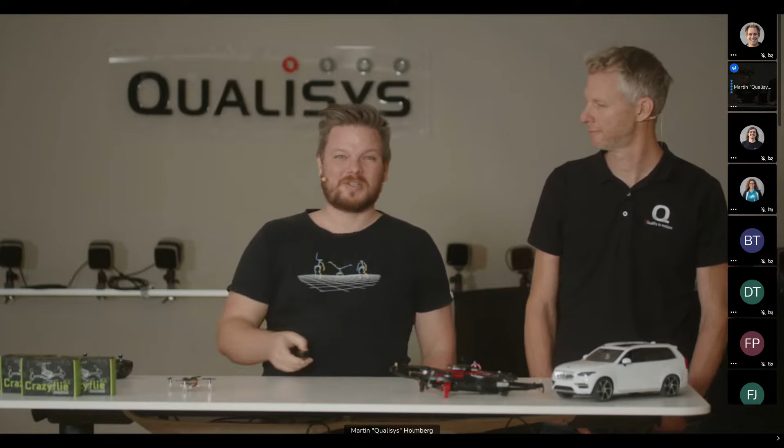We have been working with BitCraze for about 7 or 8 years now. I first came in contact and had a chat with Christopher, and then we started doing collaborative work on some of the products we're going to show. We went to exhibitions together and so on. It's been a pleasure, it's one of my favorite companies to work together with, and it's always nice to get the opportunity to go down to Malmö and eat falafel and enjoy the southern parts of Sweden.

A fun thing is I got this on Facebook today, where it said, you have a memory from 3 years ago. BitCraze was visiting us, and we got the opportunity to fly a bit of swarms. We got the opportunity to do what you always do when you fly drones, and you crash a bit. This is one of the things I enjoy with BitCraze and working with it, the fact that you can test and try things out. You don't have to have a net. It's so durable, and it's so easy to repair also. So it was just a nice memory to wake up to.

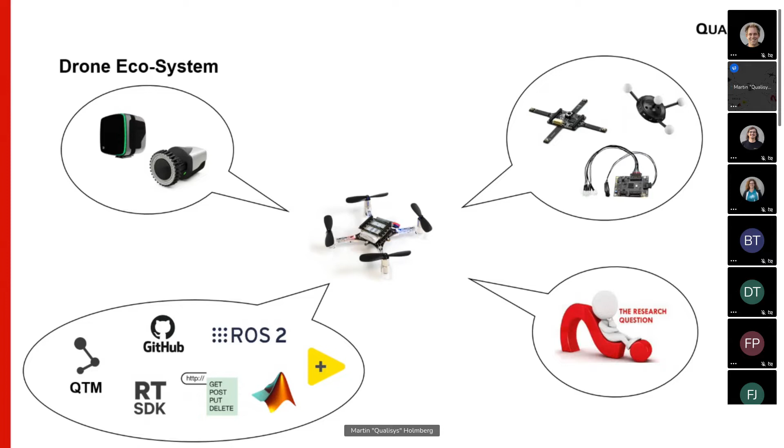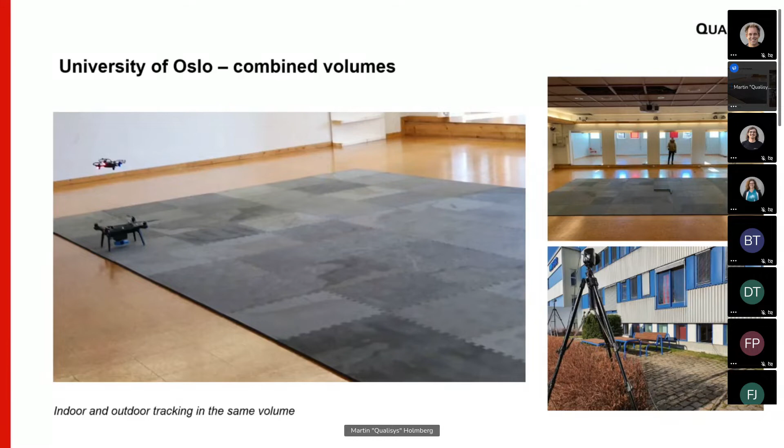So with that said, let's kick this off with a couple of examples. This one is a nice show of a standard setup in some aspects, but different in others. This is the University of Oslo, and they have a 3-volume mocap system. So you have 2 rooms indoors, separated by the pillars you see. But what is quite unique is that they also extend the volume outdoors.

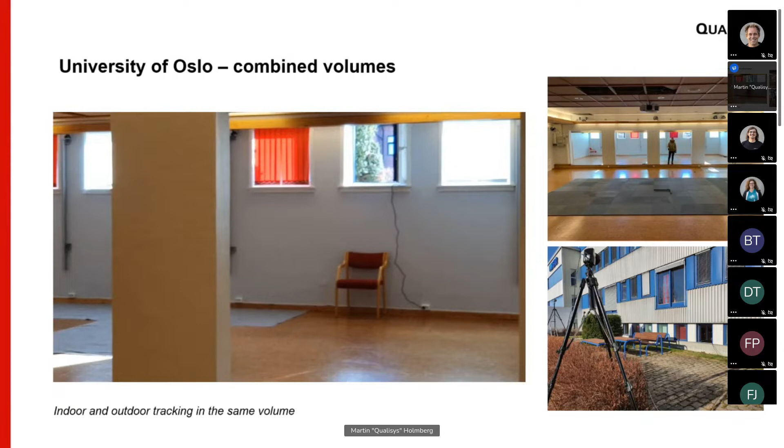Towards the end of this short clip, you'll see the drone approaching the window slowly, making its way out. On the bottom right, you see footage from outside their lab. This allows them to do some unique experiments, thanks to the outdoor capabilities of the Qualisys system, which survives outdoor weather and can operate in bright light.

Another really cool installation is this one, from Purdue University in the US. It's the largest indoor motion capture arena for drones that we know of. They house it in an old aircraft hangar.

The reason for them to do this is that they're looking to track fixed-wing aircrafts indoors. The volume is something like 60 by 30 meters.

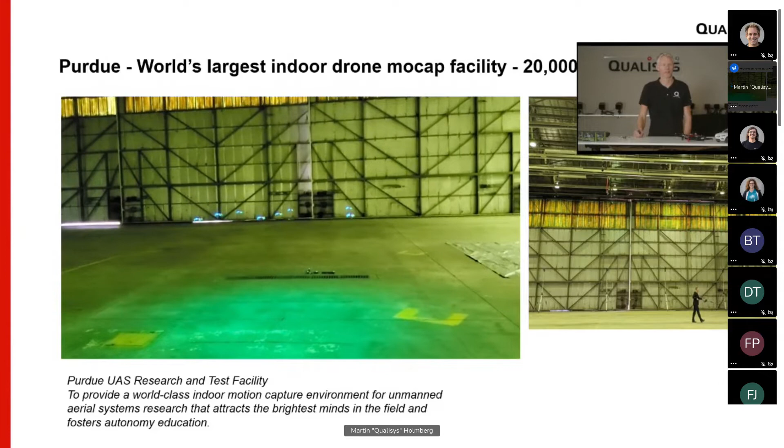On the bottom right, or on the right side, you have an image of the volume. It's something like 8 to 10 meters up to the cameras. What's so cool is that the video you're watching now shows Crazyflies being tracked.

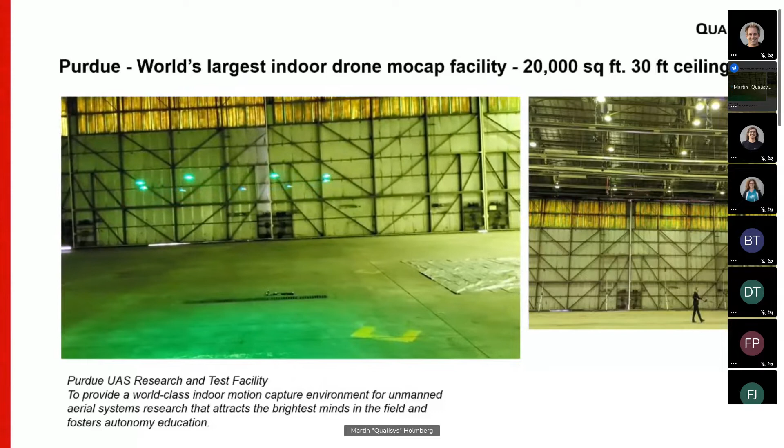We managed to equip them with a volume that allows them to track fixed-wing aircrafts over a 60 by 30 meter volume. At the same time, they can track the small Crazyflies in the center of the volume.

To do nice things like what you're watching here. And they've got great ambition to add more drones to the mix.

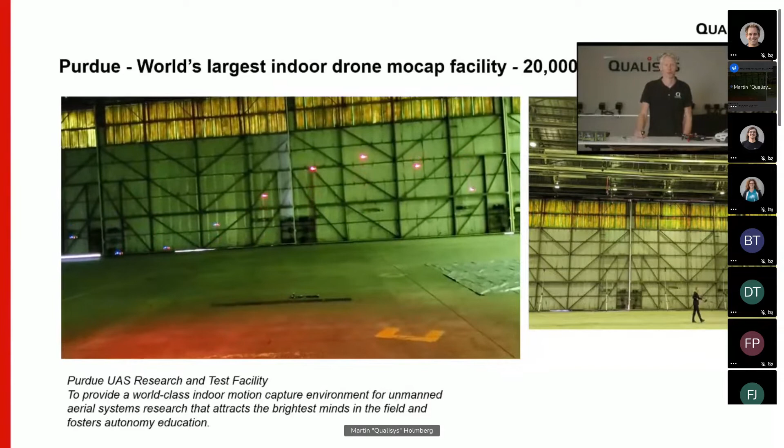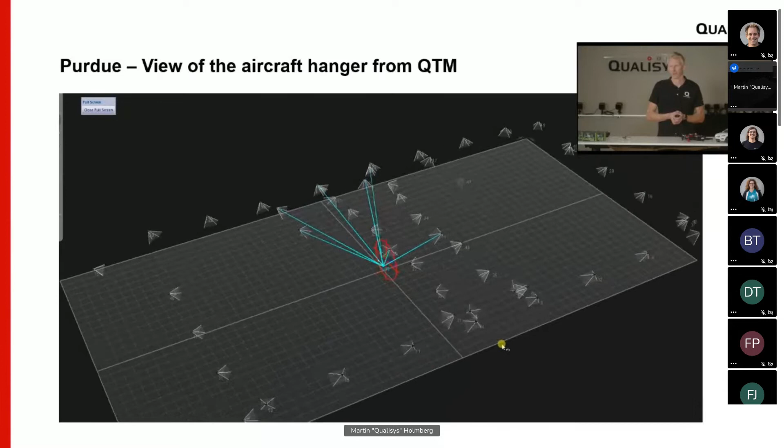When zooming out now, you get an appreciation for the scale and size of that volume. The Crazyflies are really small and tiny in this volume, but we're still able to track them at the same time as we cover the whole 60 by 30 meter volume.

So it's a very nice and impressive facility, and a lot of cool research will come out of that group's work, I'm sure.

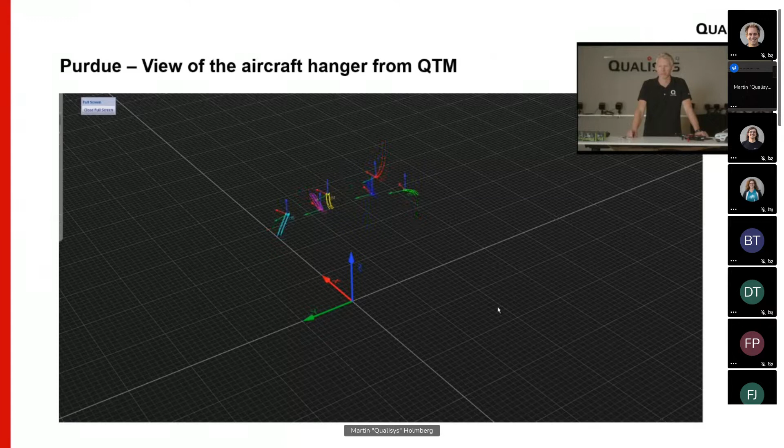I will round off this small session with a movie from Chalmers University. It's local to us here in Gothenburg, and it's from a research group focusing on human-drone interaction. In this movie, you'll see some of the devices and props that I have in front of me here, which we'll go through later today. I'll let the presenters do the talking, so enjoy this minute and a half.

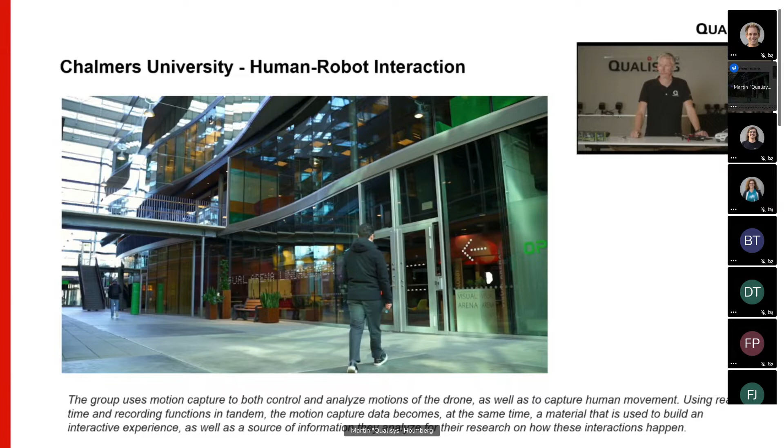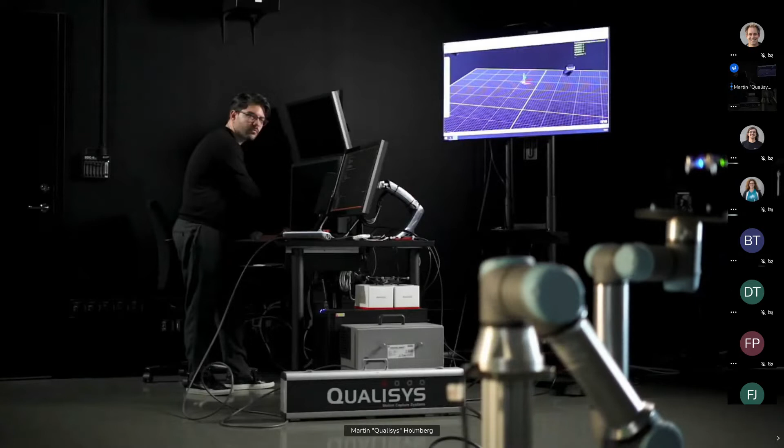Recording a robot's movement and analyzing it are not the only things you can do with the Qualisys cameras. I'm very excited about the ability to track several different kinds of robots and to stream control signals to them in real time, so we can track robots and drones and props as well as the human body in the same calibrated coordinate system and build experiences with movement, controlling, and in a way collaborating with these robots. Uniting the physical and digital worlds is the holy grail of human-computer interaction. We're grateful to Qualisys for one of the most versatile tools to accomplish this, and for actively supporting and collaborating with researchers like us.

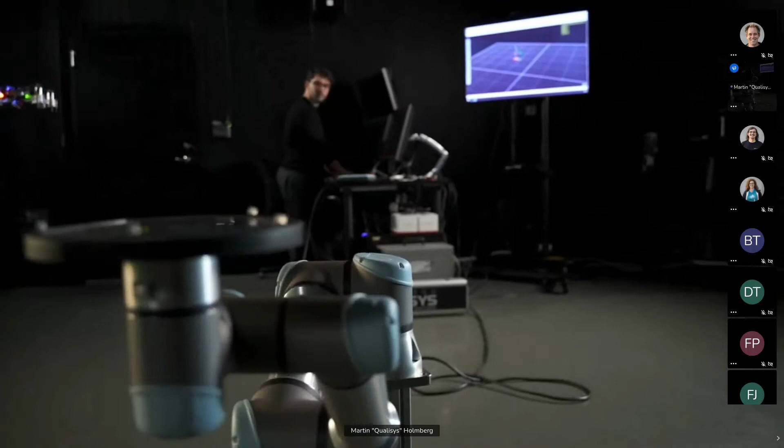So from this, let's dive straight into the tech. I grabbed 2 images from Bitcraze's website showing their kind of mocap-related offerings. They do have the motion capture deck, which is for passive markers.

It's a PCB with holes in it that makes it easy to attach passive markers. They also have the active marker deck, which is a unique cooperation together with us here at Qualisys.

They developed a tracking deck based off of our proprietary active tracking technologies and made it available to all Crazyflie users out there. What makes that unique is the fact that you can get full 6-DoF orientation and position data.

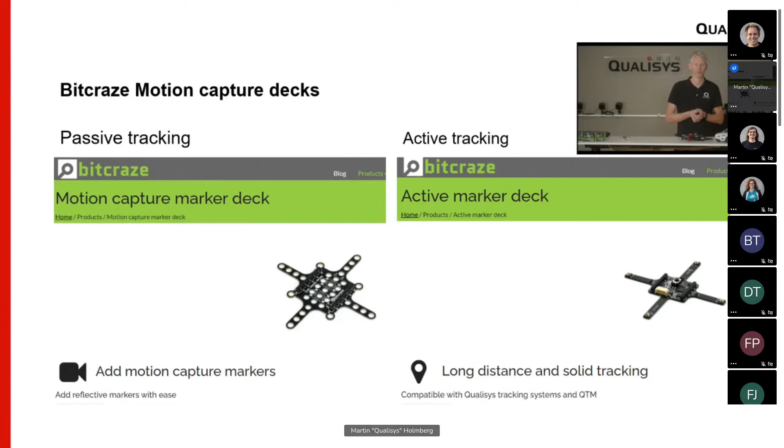So 3 degrees of freedom position-wise, 3 degrees of freedom orientation-wise. And you can do this with a lot of drones. We'll look into that shortly. The same kind of active technology is used in some of our products.

This is the active tracker. It's a packaged tracker with 4 markers that you can attach to objects, and it allows you to track objects at a very large distance, and a lot of them at the same time.

We do have an unpackaged version, which we call the naked tracker. It's meant to be embedded into objects, making the tracking capabilities of the object as hidden as possible.

And lastly, we have the Bitcraze active deck. So all of these products use the same active tracking technologies, and it works together with our cameras and the QTM software in the same way.

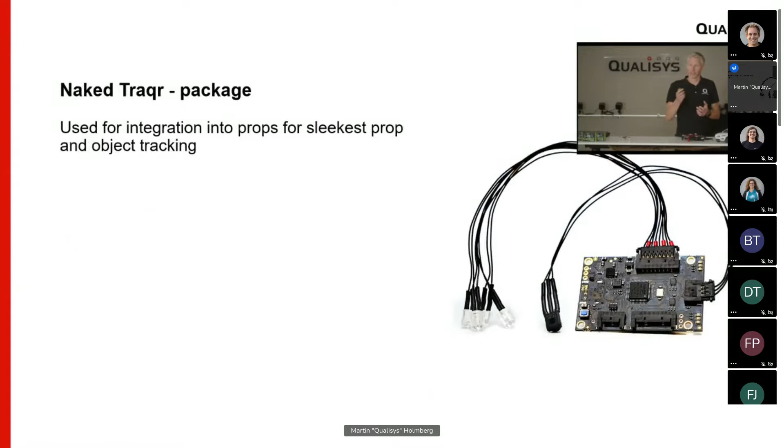Looking closer at the Naked Traqr, it's comprised of a PCB with a marker processor and the tracking technology built into it. It comes with 8 LEDs. So, for example, if you have a large device that you may not see from all sides at the same time, you can have 8 markers all around the surface of it.

It also comes with an IR detector, and this is one of the unique aspects of this system - it uses optical means to synchronize the cameras with objects. This is great in the sense that it's not affected by radio interference. So, for example, you can use it when you have a lot of Wi-Fi networks and other kinds of networks, and it's not affected by that.

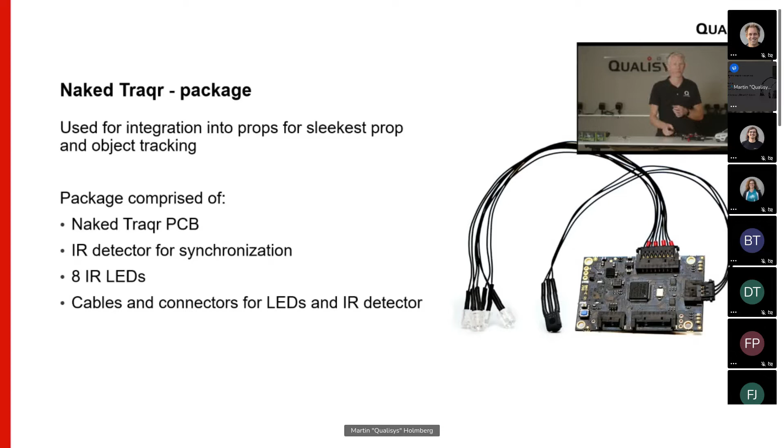So then, why active, you may ask? There are a couple of reasons. One is identification. If you're used to optical tracking systems, most of them use passive markers, which have a lot of advantages. You can easily attach them with double adhesive tape. They're lightweight, and they don't require to be charged.

But if you're tracking objects, especially if you want 6 degrees of freedom, you need 3, 4, 5 markers on the object. And if you have a lot of objects, it can be hard to create geometrically different patterns, which is required to separate one object from another. Using active technologies, this is not necessary because we use sequence coding instead. So each marker is associated with an ID, so you can separate one marker from another.

And with our system, we can track about 185 objects, each with 4 markers on them, at frequencies up to 500 frames per second - the last one depending on the camera model that you use. Embedding LEDs also makes it possible to hide the tracking capabilities of the objects.

What's not listed here is range. So usually you also get added distance from cameras to objects if you go with active technologies. But still, passive has a lot of upsides as well. So it all depends on the use case.

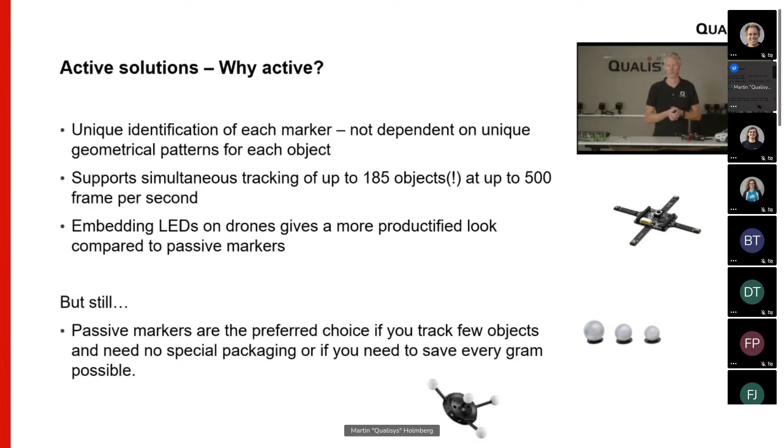With that said, let's take a look at the objects. So if we can get the full video, then let's swap to the other camera. Thank you. This is what the Active Traqr looks like. As you can see, it's not very big - too big to be carried by a Crazyflie though, but still.

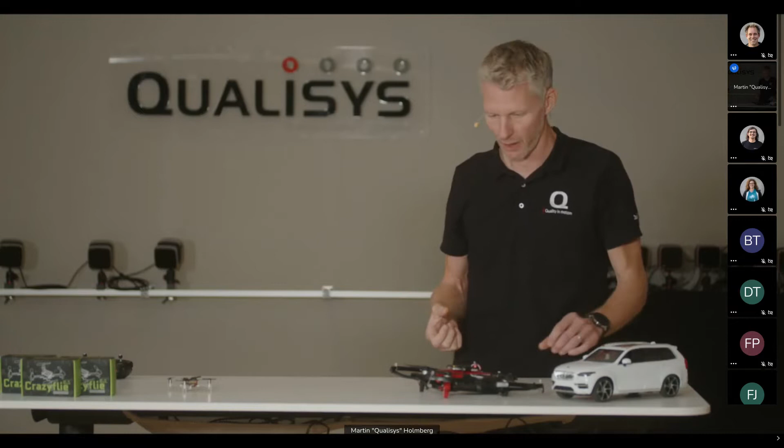This is what the active deck looks like - let's see if I can put that in a way so you can see. It might be hard to see, but it's basically 4 LEDs together with a microcontroller and IR receiver. This is what the Naked Traqr can look like once embedded into an object. The whole point is that you're not supposed to see it, but if you look close, there are some black dots on the chassis. These are LEDs that are integrated into the chassis.

So this one is tracked by our system. And to kind of stick with the theme of today - sorry about this, it's a DJI drone - but we wanted to mount the Naked Traqr onto something that we can fly. So let's see if we can show you what this looks like in the software. You have 4 LEDs on this one together with a Naked Traqr PCB. So let's see if I'm able to turn this on.

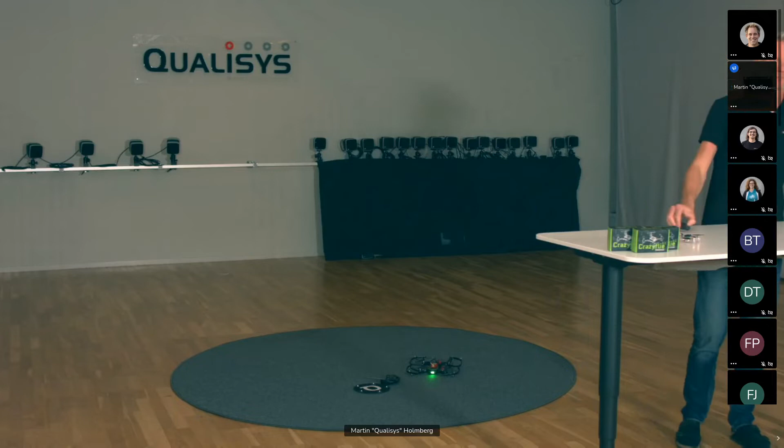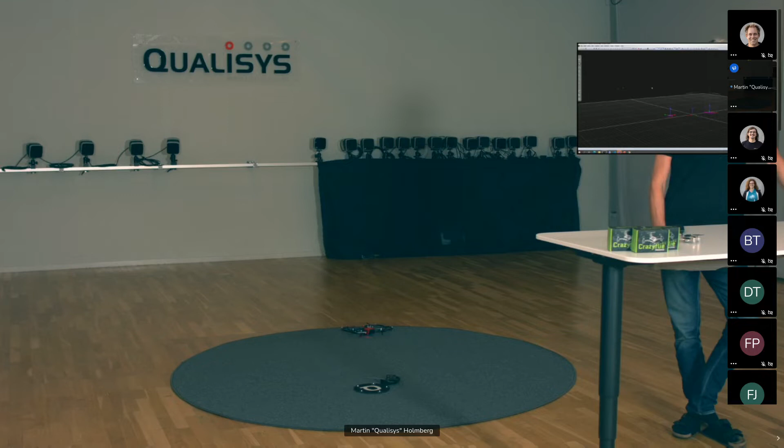And now we're going to swap to the QTM software, so you can see what this looks like in QTM. There we go. So I hope you're able to see the small coordinate system moving in the QTM 3D world.

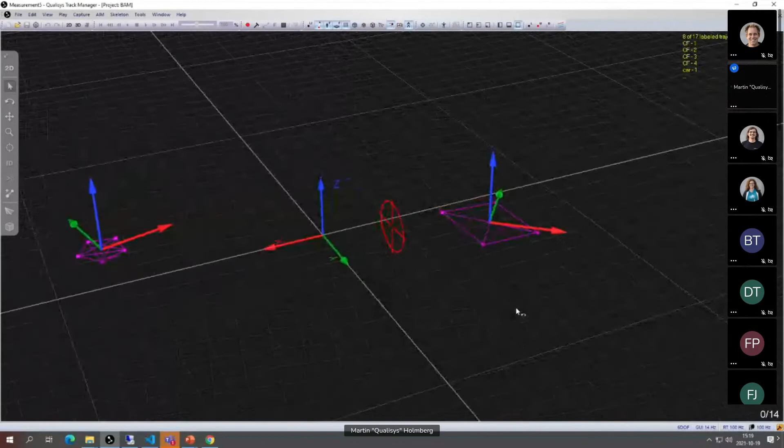And if we perhaps can enlarge the QTM screen, you see three coordinate systems. The one in the middle represents the global coordinate system of the volume. The other two represent the objects that we have in the volume. One is a landing pad - we will use that later on with passive markers. And the other one is the DJI drone that we just flew, and now we just picked this one up. So this is what the data looks like in QTM.

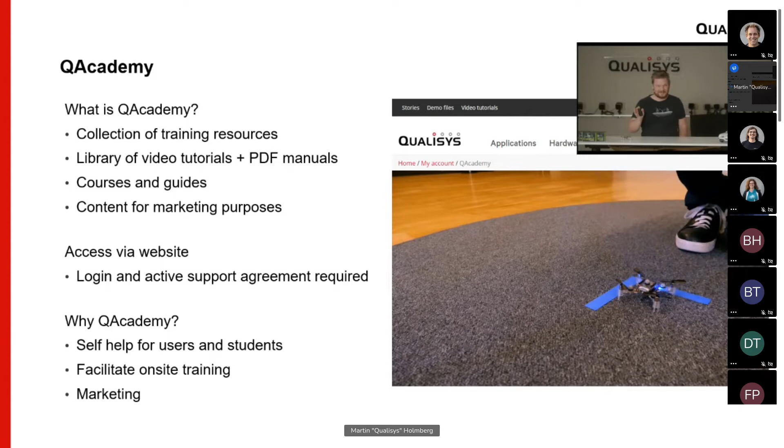Just want to mention a bit of learnings also, and the teaching resources, which is QAcademy for us. We have a huge collection of training videos, including how to fly a Crazyflie with a Qualisys system. It contains videos, PDFs, and so on, and it's available for all our customers. If you are a customer and have missed this, please have a look. If you're not a customer but you're interested, just shoot us an email afterwards so you can have access to it and see how to run the system.

Now I'm just going to jump over to the presentation computer and talk a little bit about our GitHub, because we actually filled that one with all our open source projects. We believe that everything outside of our core technology, the tracker, should be open source. We enjoy the collaboration and get quite a lot of pull requests, and we do our own development here too. We have, as I said, SDKs for a bunch of things, and we also have Crazyflie resources.

This is a small repository with directions on how to fly, what settings to use within QTM, and a bunch of examples. One of the examples here is BAM 2021, where Mehmet, as you saw in the video, wrote a small script that demos how to fly. There's also an intro or tutorial on how to use this code and how it was written, on Mehmet's homepage. There will be a link in the chat, I guess, for it afterwards, or just ask us and we'll get it to you.

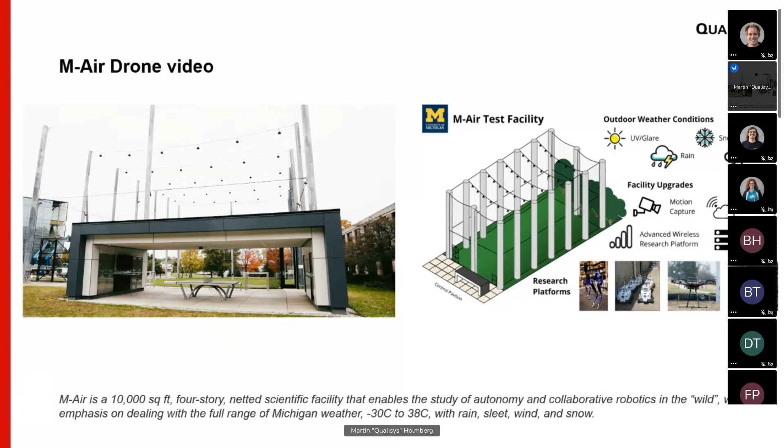This is from Michigan in the US. They've equipped a netted place with outdoor Qualisys cameras, which sit there permanently in the Michigan weather, whether hot or cold, rainy or snow. They use this to do some amazing research. I'll leave that to the presenters, so please enjoy.

It's never been easier to get drones working and flying at this point. Whether the world's ready for it or not, companies are going to start trying to do things with drones. This facility is called M-Air. It's the netted flight facility that allows us to do all kinds of experiments with flying objects that can't escape.

Our goal with the Qualisys motion capture was to have coverage of the entire facility, or at least as much of it as possible, to allow the vehicles to fly with continuous tracking.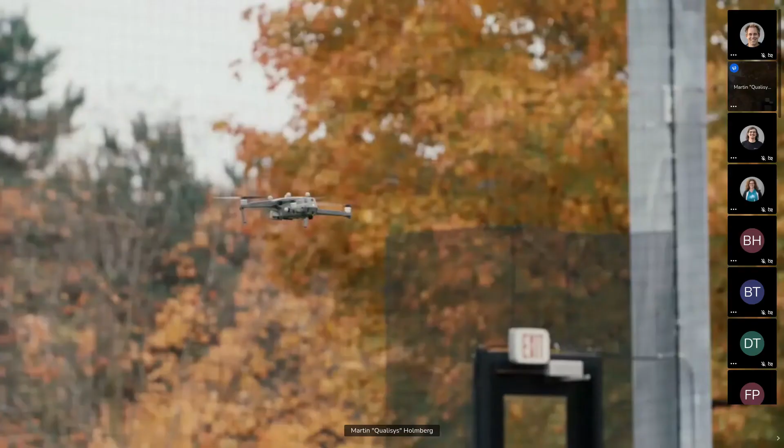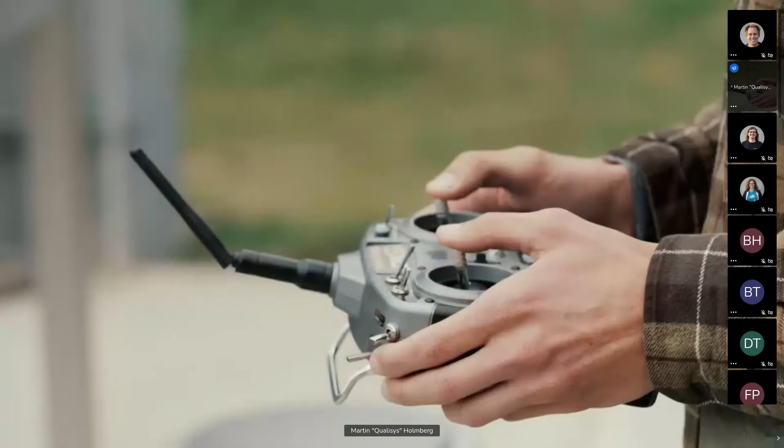In aerospace engineering, we study a variety of things ranging from vehicle design and analysis of the structure to control. Control in the large sense involves perception, decision-making, and acting. All of these have to be done in real time in flight, because it can be less than a second before a drone crashes if it makes a poor decision.

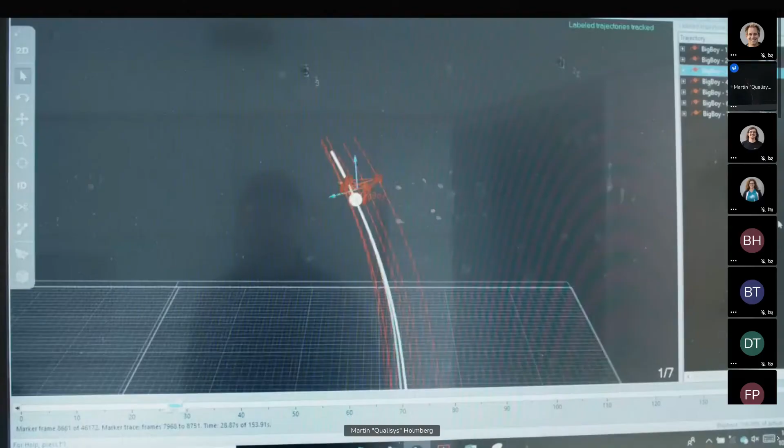Any facility that provides comprehensive testing for flight or ground-based robotic systems needs to have truth data. Qualisys can provide that data, and then each user can decide what they want to do with it, either in real time or later after the test concludes.

The quality and reliability of the motion capture system are outstanding. I believe it's down to like a millimeter of accuracy on where the vehicle is, which is not attainable through really any other means. Having that kind of position feedback is invaluable.

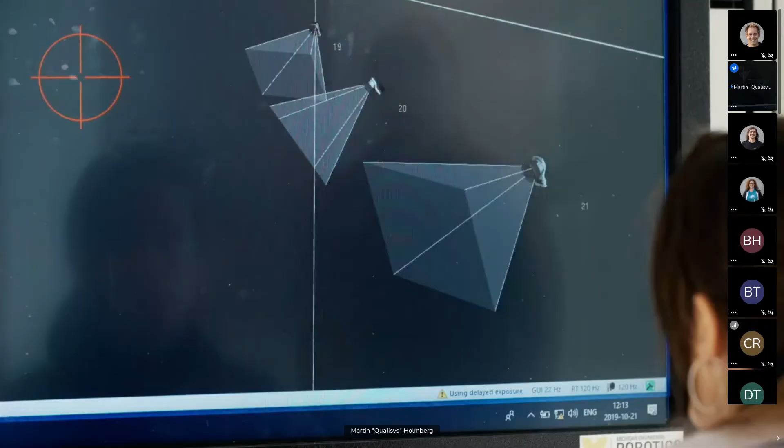Qualisys had the longest proven outdoor option, which had a big influence on our decision. We look at the weather as a real feature, not a bug here. It had to be able to run in the snow and the rain, ice events. As long as my hands are warm, I can use the Qualisys system out here.

I think a lot of people who are developing facilities for flight vehicles recognize the need to have a high-quality motion capture system. Using the information from the Qualisys system, we can automate these vehicles.

You take people out of harm's way and you get the job done faster and more efficiently than you could with a person. It's used in search and rescue, ski patrol, railroad inspections, wind turbine inspections, and different photography applications.

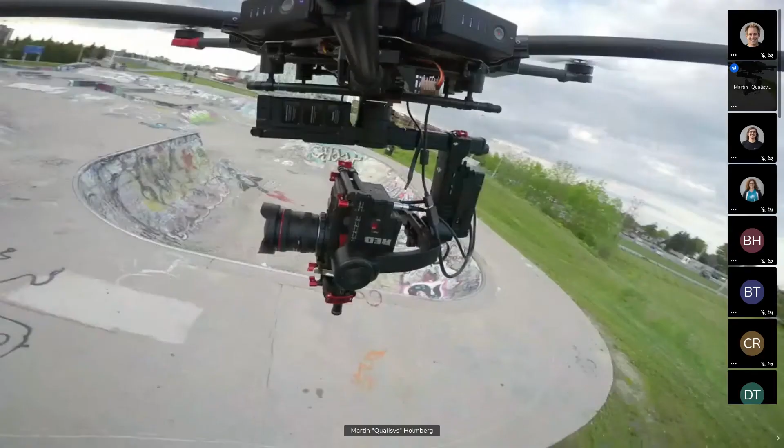We like to think that the University of Michigan is somewhat in the lead with both having a really nice professional facility constructed and completely equipping it with motion capture. We imagine others will follow us.

Cool. Thank you very much. Thank you everyone for listening. We were a little bit faster than planned. We demoed really quickly, so that's nice.

Now I guess that Christopher, were there any nice questions in the chat? Yes, there's not a lot of questions in the chat, unfortunately. But if anyone has any questions, make sure to ask them now. I have some things that I am curious about.

First of all, the outdoor cameras or systems, are those cameras protected in any special way? Do you need some sort of boxes around them, or how does it work?

No, you want to grab that? I can do that. So yeah, one of the camera series, the one called Arqus, comes in natively protected versions. They are rated IP67, meaning they can withstand a lot of moisture. They can actually be lowered into water for a brief period of time, and they're also rated to run in higher temperatures than the normal cameras.